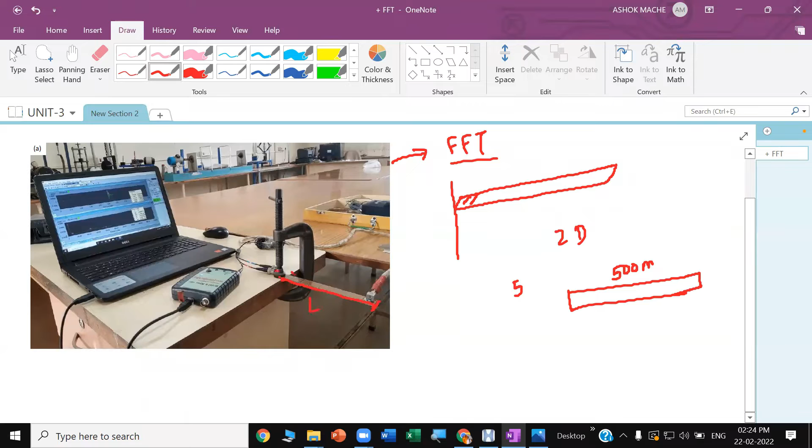This is a cantilever plate, and its length is 500; the length we can vary, because this free length we can measure from here up to the free end, right? And you can vary this length just by clamping on this table as per the requirement. What is going to remain fixed is the width, 50, and the thickness, 4. Okay, so that will remain the same.

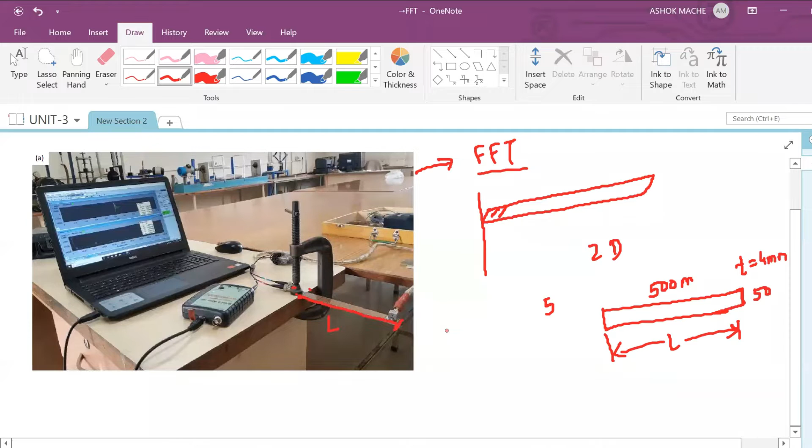Width is 50 but length you can vary here, and you will have different sets of readings accordingly, and you can find out the corresponding natural frequencies and mode shapes. Okay, so also you can find these by using a formula. So this is that formula: omega n is equal to 1.875 squared, under root EI by rho A L raised to 4.

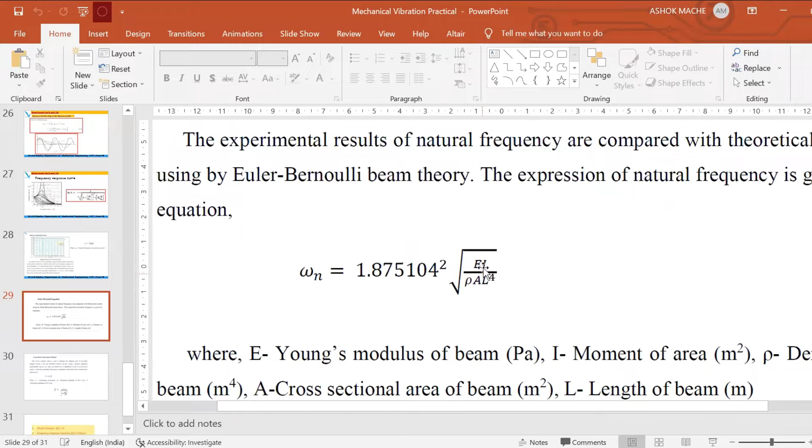So here E is the Young's modulus, I is the area moment of inertia, rho is the density of the material, that is steel, A is the cross-sectional area, L is the length of the beam. So these are the things. Omega n we can find out analytically by this method.

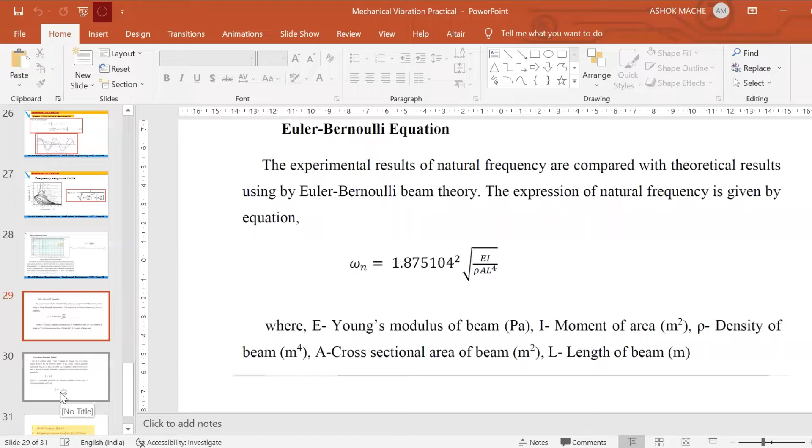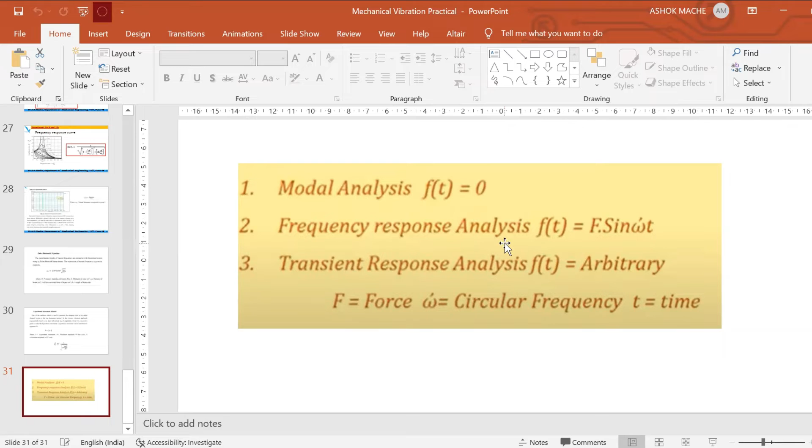And here what we will be doing is the modal analysis, which is in the absence of external force, so f of t will be 0 here. We can apply a force also, but in modal analysis we will not apply it. The steps are like this. I will explain the steps here clearly. First I will create the meshed model.

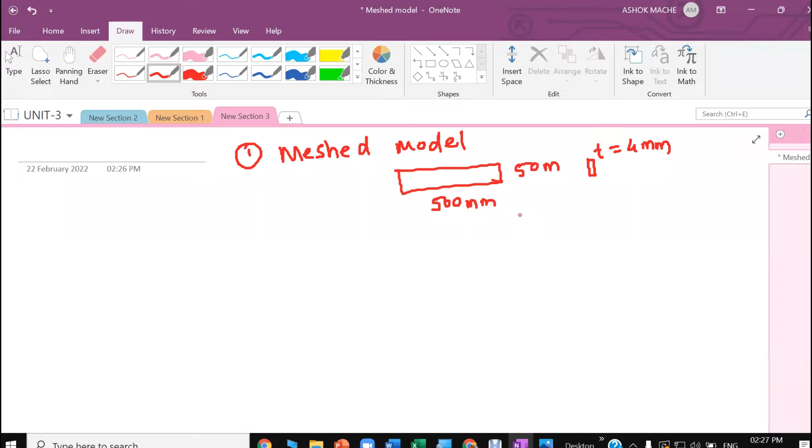For the size of this plate, I will take 500 as the length. The width will be 50 and the thickness of this plate I will take as 4, which is the actual specimen that you are going to use for your vibration testing. So I will keep the same so that it will be easy for you people to calculate. Okay, so we'll go for this.

We'll create the nodes, then the surface, because we are doing 2D meshing here. So I will create the nodes. First will be this. Once you select 0 0, just hit the create button, and one node will appear here. You can always fit the model to the screen.

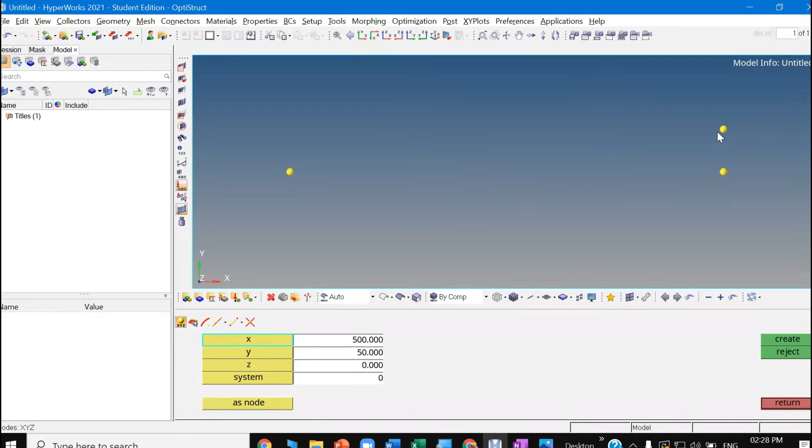Next, the x coordinate will be 500. Then you can hit the middle mouse button instead of saying create; you can do either way. Width is 50, so the y coordinate will be this, and then if I keep x coordinate 0, you get this. So you got these 4 nodes, and we can create lines out of these nodes.

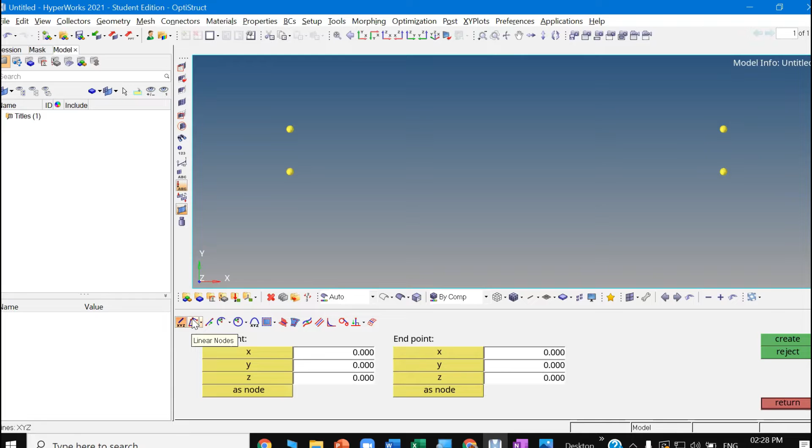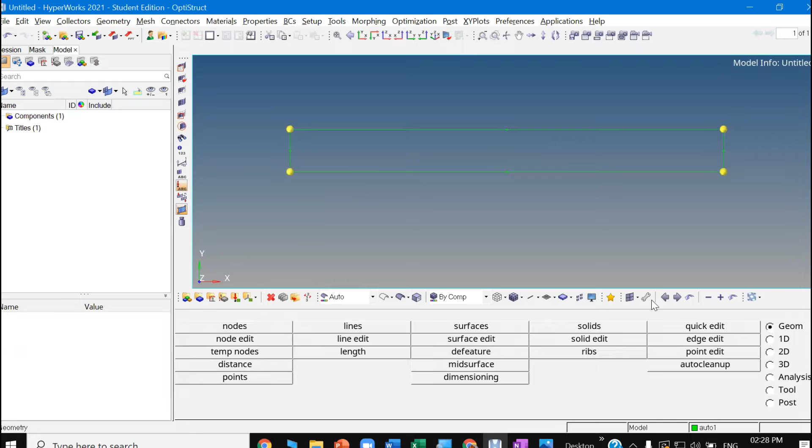So we can go to the geometry page and select lines here. Select linear nodes. I will click this to this, so the line is created. Then from this node to this, hit middle mouse button; this node and this node, middle mouse button; this node and this node, middle mouse button. So lines are created, and automatically you can see the component is created.

If you create lines or elements, a component will be created, and whatever mesh model is there, nodes and elements, will be stored in this component, right? I will rename this as cantilever beam. So once these lines are created, we can create the surface out of them.

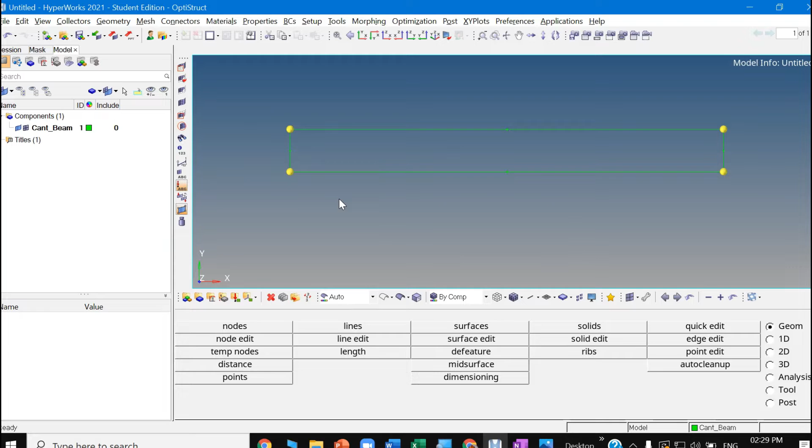For that purpose you can go to 2D and use the ruled option here. In this ruled option you can create the surface from the line list. Select the lines in sequence: 1, 2, 3, select only 3 lines, and for the closing line, whenever you want to select the last line, you click the next line list and then select it. So you must follow this.

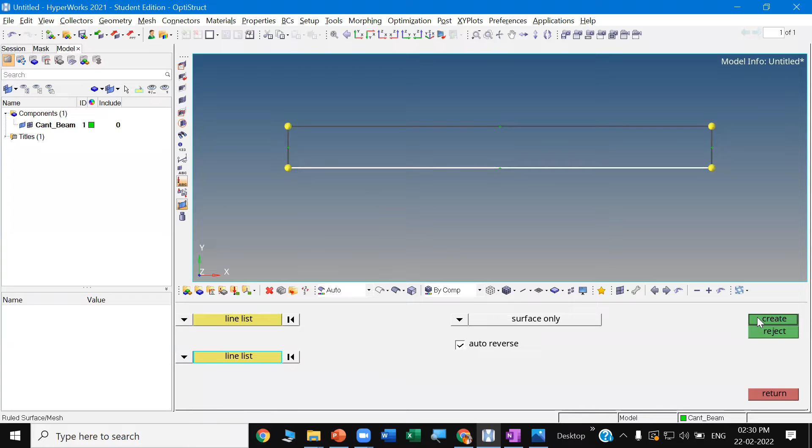There are different options: you can mesh and delete the surface, mesh and keep the surface, or create the surface only. Let's do create surface, so that we get the idea that the surface is created. Once this surface is created, you can mesh it by going to the auto mesh panel here, and you will have this surface.

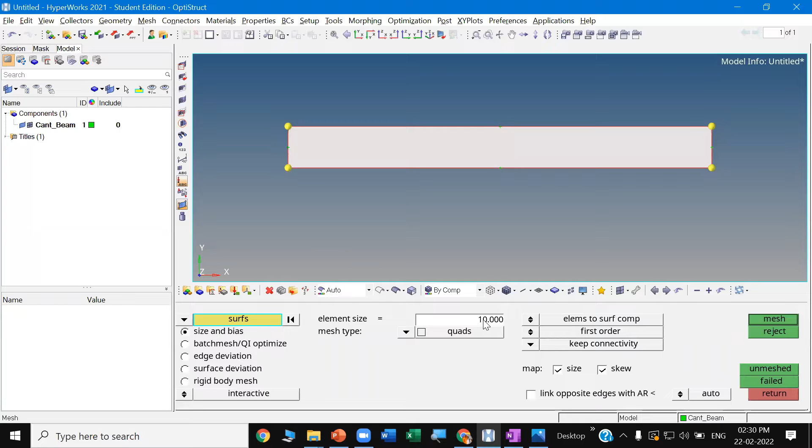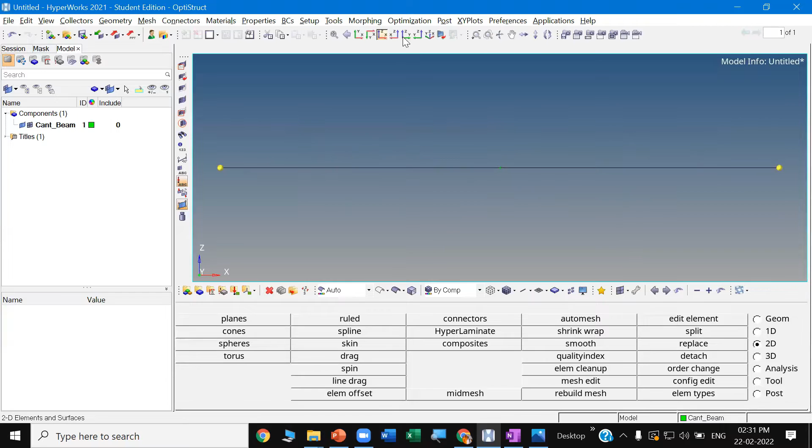Before that, select the elements as quads only, select this surface and just mesh it. Element size is 10; if you want it smaller, you can do that also. I am keeping the default mesh size. Now it has been meshed. So our mesh model is ready, and if we click on this, you will see the edges clearly. We can view it in different views like ISO.

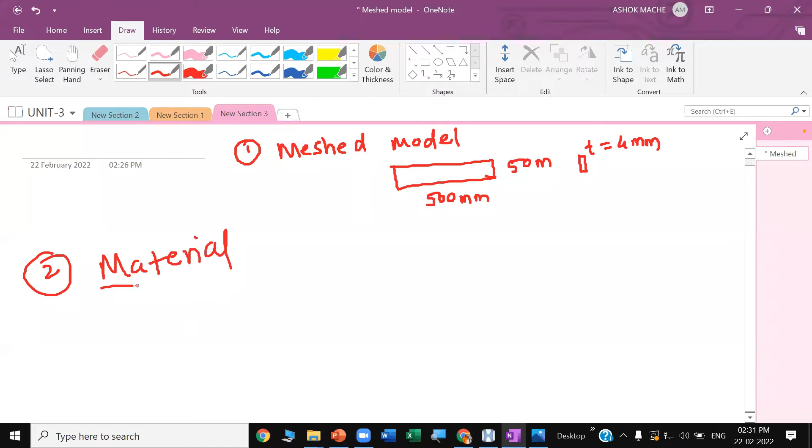Okay, so this is the first step, and now coming to the second step, that is to define a material. We have to define the material model. So this is the second step. So we'll go for defining the material. That option is just near to these components. You can create the materials here, and then you will get here create.

So I will give the material name as steel material for cantilever beam. Okay, steel material for cantilever beam, and this material is isotropic. You can name anything, right? And here the material card you have to select, because for isotropic material either MAT1 or MAT4 material cards are available. MAT1 and MAT4 stand for isotropic material in OptiStruct.

For different softwares it will be different. Just like for LS-DYNA, it will be MAT24. So once you give create/edit, because there you have to give the properties, you can say create/edit, and here you can define these properties. By default the steel material properties will come there. But if you are using a different one, then you can edit manually here.

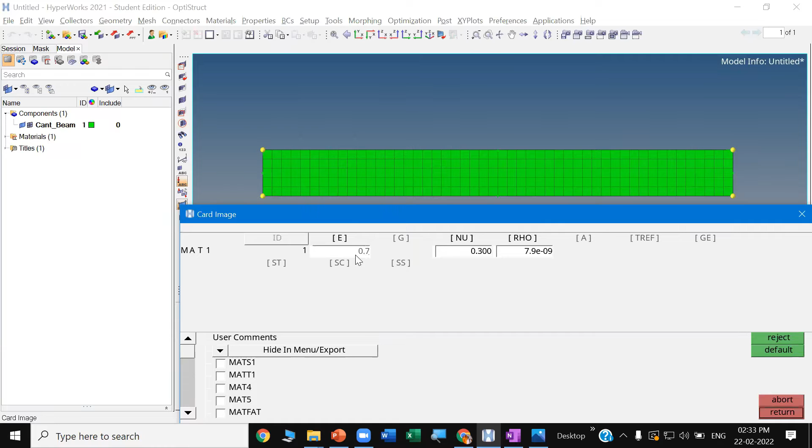Suppose if it is aluminum, then for aluminum the modulus will be 0.7e5 like this. But now here it is steel, so you can write 2.1e5. Likewise Poisson's ratio and rho are given, so I will keep them as default. Once you create this, immediately this material card will appear here. You can even change the properties from here also, suppose if you want to make the Poisson's ratio 0.2.

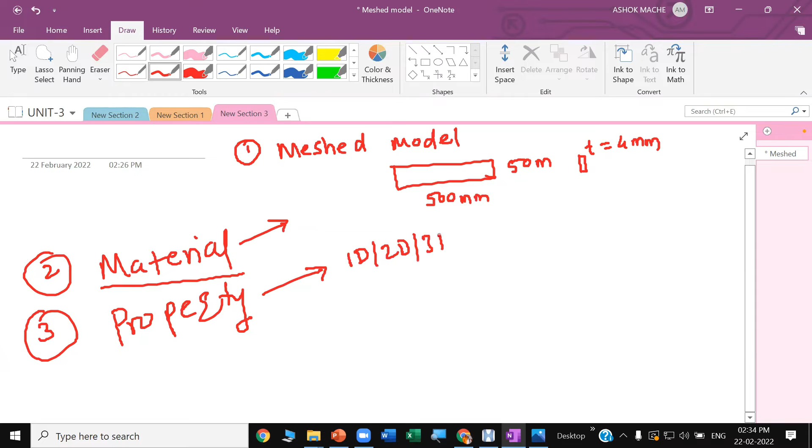So materials we have defined. The second step is over. And what is the third step now? We have to define the property. In the property, basically we are selecting what type of element, whether it is a 1D element, 2D element, or 3D element, that we will be defining here, and what type of stiffness matrix, what type of formulation you are going to use.

In a 1D problem, you again have different types, whether it is a bar element, a beam element, a spring element, or whatever. 1D also has different types of element. So what you select matters, because the degrees of freedom associated with each element are different. A bar element has only 1 degree of freedom per node. For a beam element, there are 2 degrees of freedom per node, one rotation and one translation.

Similarly for 2D, you have different formulations: plane stress, plane strain, then shell element, or axisymmetric, like that. Different stiffness matrices. Even the plate element is also there. Each has different degrees of freedom. If you consider the plane stress condition, it has only 2 degrees of freedom per node, that is translation along the y-axis and translation along the x-axis.

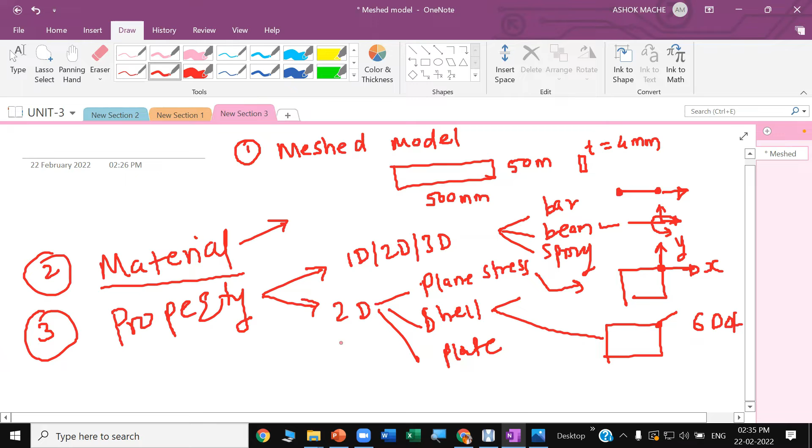If you take the shell element, you have 6 degrees of freedom per node, that is translation in x direction, y direction, and so on. I think I talked about this in the theory also. So these are the things you have to define in the property. Also if it is a 2D element, from the mesh geometry you will get the length and width, but thickness you define here, suppose 4 mm. That's why defining the property is important. I will show you how all these things can be done.

So going to this, after materials there is an option property, and in property you can just name this plate cantilever beam, cant beam, and for that I am selecting the shell element. So you can write like this. Type will be 2D here. Card image is PSHELL. For shell elements you have to select the PSHELL configuration.

So here you have to select PSHELL, and the material is already defined, so you can select the steel for cantilever beam. So these things you will be defining in the property: name, type is 2D, card image is PSHELL, and material is cant beam.

So once you do this, then just say create edit, or you can just say create, no problem, right? If you just say create, that property will appear here. But here we still have not defined thickness, but you can define it here. So you can see here, I can define the thickness, suppose 4 mm. So 4 mm thickness I have defined. You can edit that from here also.

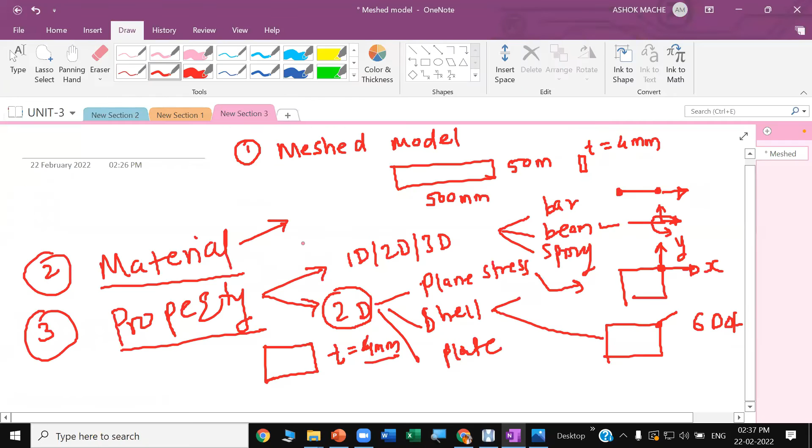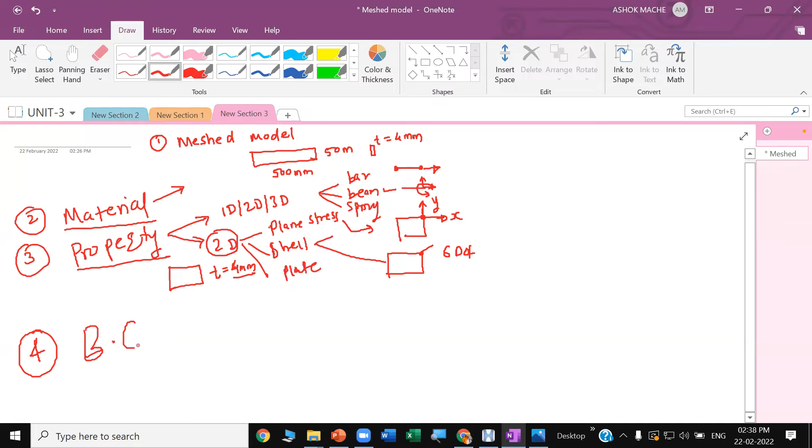Okay, so if you see here, card image is PSHELL, this is the material, and the material will be selected by default, and thickness you have defined. Okay, so this is important. So the third stage is this, and now the next stage, once you define the property, is that you have to define load boundary conditions, right? Load boundary conditions, that is the load collector. So here what will be the load collector?

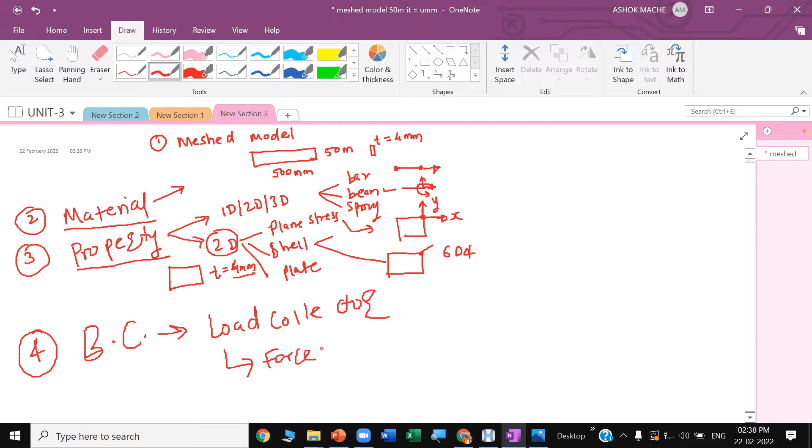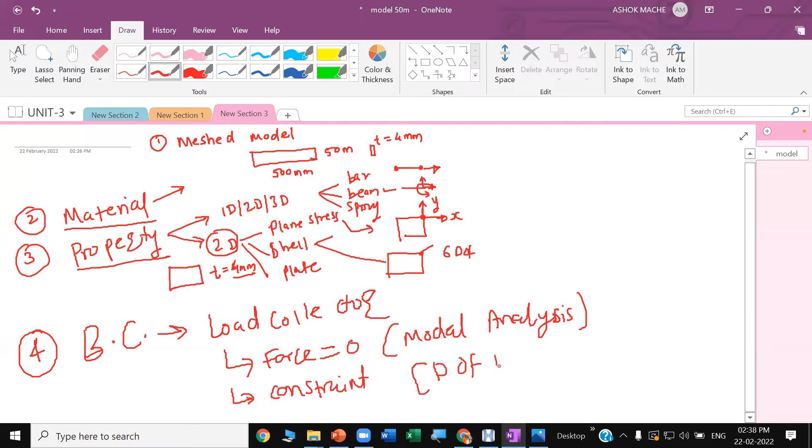The load collector, because now there is no force. Remember that force is zero here because this is a modal analysis. Since modal analysis is done in the absence of external force, force is zero. But you have to constrain the structure, meaning you have to define the constraint, the degrees of freedom you have to decide here. And since this is an eigenvalue problem, you have to define one more card here, EIGRL.

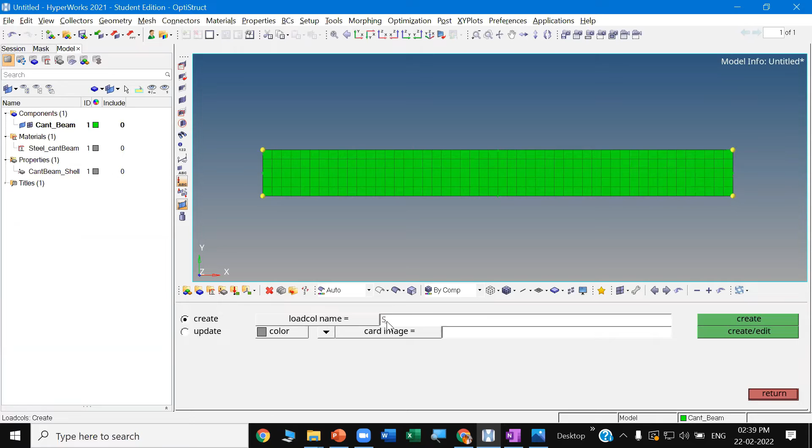Next to this property, you can see all these are in sequence: component, material, then properties. After properties we can go for the load collectors. Force is not required, constraint is required, and we call this a single point constraint, SPC. We can just say create. Immediately it will appear on the current page. You can change this color, suppose to red, like so. This is the SPC.

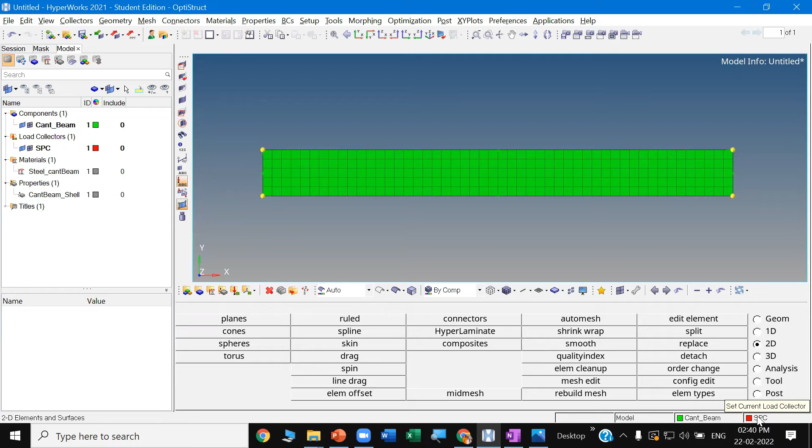Once you define the single point constraint, you have to tell the software which nodes have been given a single point constraint. So you make the single point constraint the current page, go to the analysis page, and select constraints. Here you will have the degrees of freedom, whether you want to release or arrest them. Then you define the nodes you want to fix. For this cantilever beam, the nodes on one side are fixed.

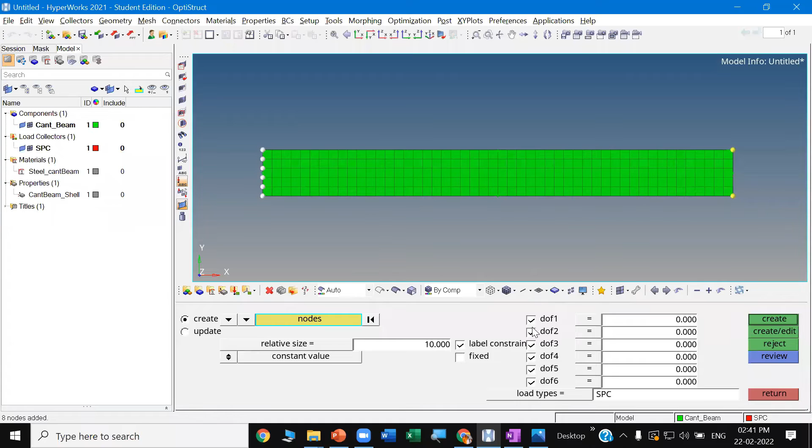So here you just press the shift key and drag your mouse to select these nodes, like this. Once you select them, all degrees of freedom have been checked. You can just say create. Immediately you can see all the degrees of freedom 1, 2, 3, 4, 5, 6 are constrained, that is 3 translations and 3 rotations.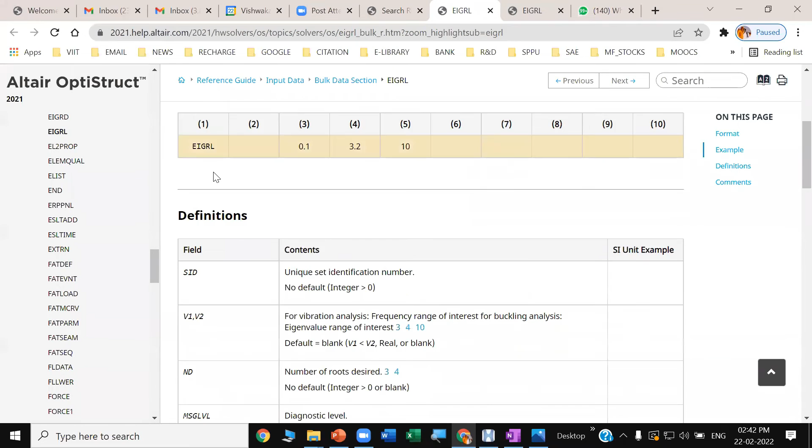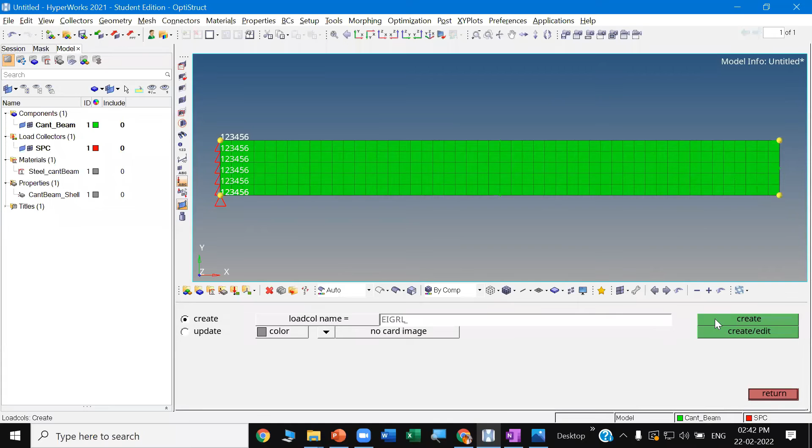This EIGRL bulk data entry defines data required to perform real eigenvalue analysis, vibration or buckling, with the Lanczos method. In this you have to define V1, V2, and the number of roots to be extracted. For an eigenvalue problem, this card you define in the load collector. Again, go to the load collector and say EIGRL, create. This load collector will be created. You can change the color to something else.

And here you have to select the card image as EIGRL. So what is EIGRL? As I explained, it defines the data required to perform real eigenvalue analysis. You can find this page; it is very simple to get the help. You can go to the HyperWorks help home.

So I have defined this card EIGRL, and then the frequency range you can define, from the minimum, fundamental frequency to the maximum frequency. I don't know the range, so I will give some range up to 100,000. Number of modes to extract, let's say 10 modes.

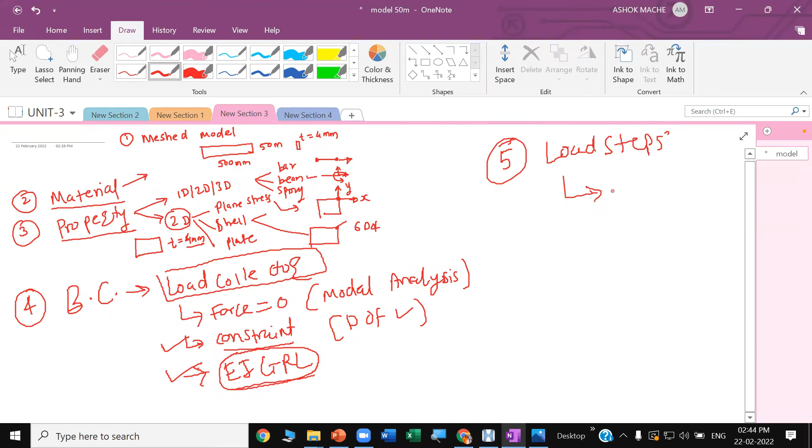Step number 5 is load steps. In load steps you define the type of analysis, whether it is linear static, thermal analysis, or modal analysis. There are different types of problems.

I have just given you two to three examples, but here you can define the type of analysis in the load steps. So you can just go to create here, and say load steps. Okay, and I will say modal analysis. Once you select this, the important thing you have to select is normal modes. Analysis type is normal modes.

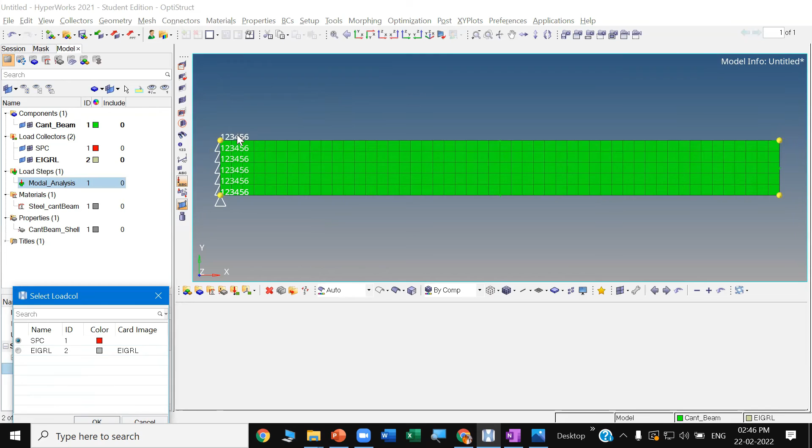Linear buckling is also eigenvalue, but it is different. For modal analysis, you select the analysis type as normal modes. Then single point constraint: these loads are SPC, which we have already defined. Once you select, it will get highlighted here. Just say okay. Then you have to define the EIGRL method structural. Here you define that EIGRL card.

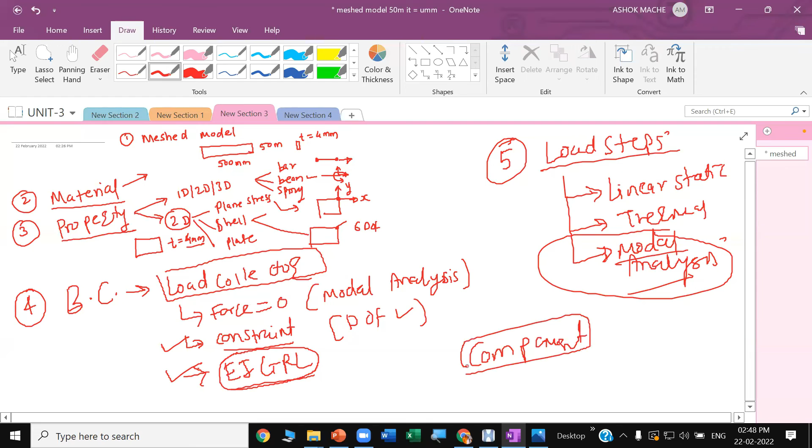And then here you define the output. In the output, you want the displacement. That is the only thing. Strain is not required, but let it be. We created a component at the start, right? But in that component we have not updated this model with the material property and everything.

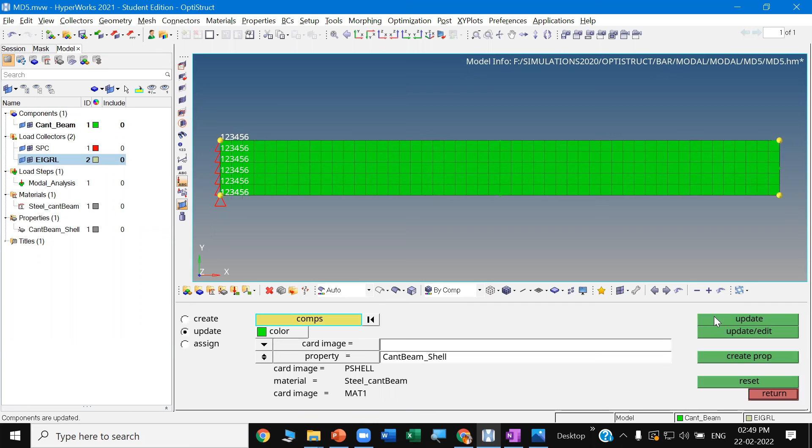For that purpose you again go to the component, say update, then select the component. This cantilever beam is a component. Card image, let it be, but the property: this is the property, and material and other things it will take accordingly. So you tell the code that for this component these are the properties, this is the material, and then you say update. Once it is done, you can save it, and I think nothing is left.

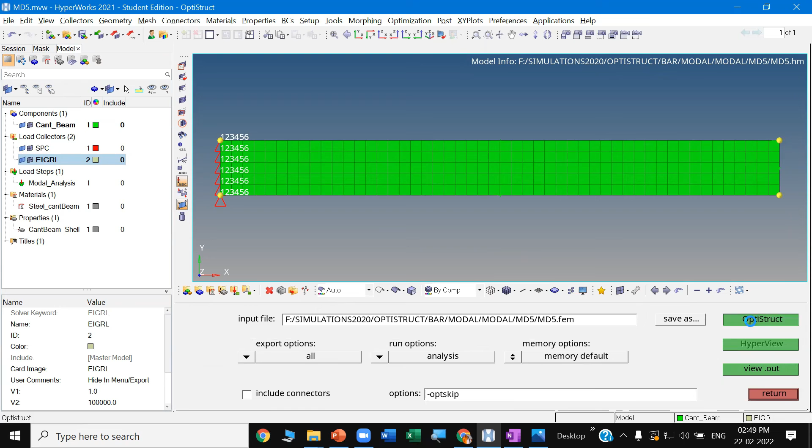Then you can go to OptiStruct here. You can save your model, and export options will be all, run options will be analysis. Just click on OptiStruct, and you will get this result: analysis completed. Once you get this window, click on view, and here output. You will get this notepad file.

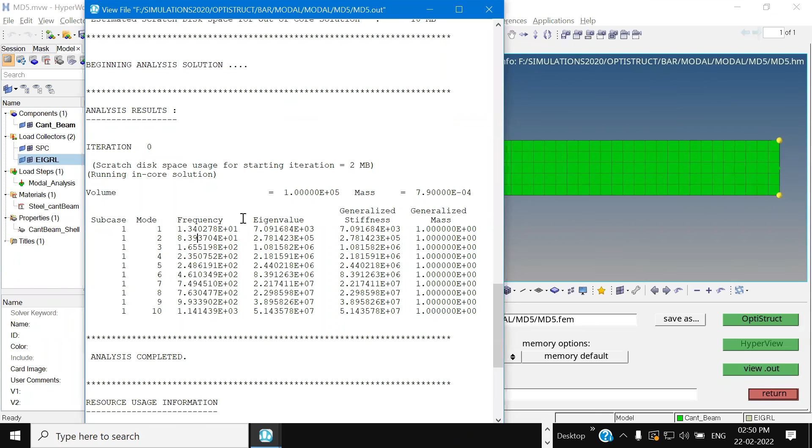These are the frequencies: mode 1, mode 2, mode 3, and so on. We have extracted the first 10 modes, so the lowest frequency is called the fundamental natural frequency. Here 13.4 hertz is the fundamental natural frequency. We have to check whether this is as per the expected value. I have created this in Excel with this formula, and you can also do it here.

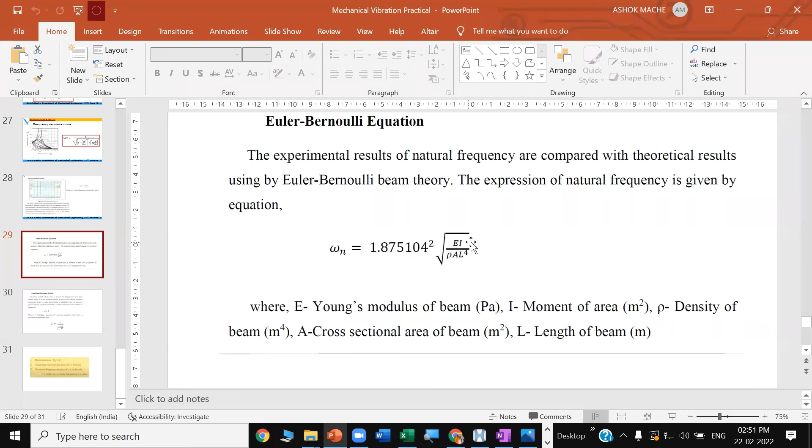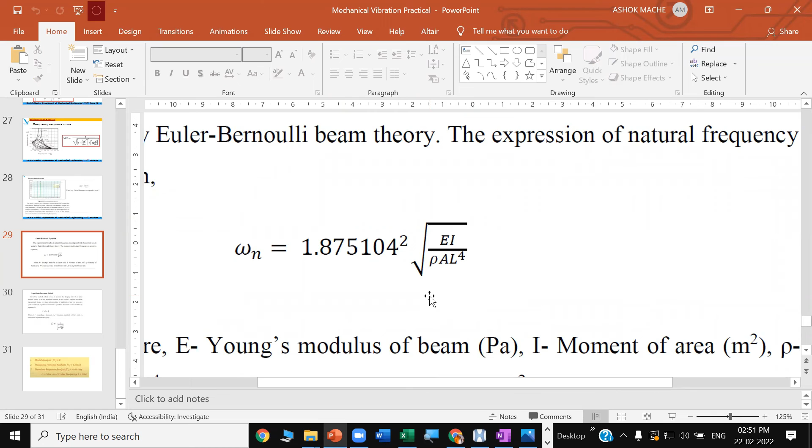You enter E, find out I for our beam, and put rho, the density for steel. Cross-sectional area is 4 mm into 50 mm, and length we have taken as 0.5 meter. Just calculate by this formula. You can also do this exercise. In this Excel I have put the same formula, frequency with 1.8 squared and the square root term.

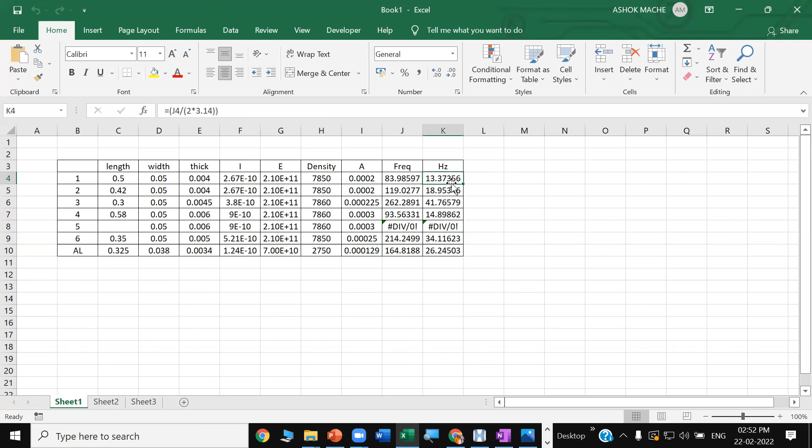Here are the properties: width 0.05, thickness 0.004, length 0.5, this is the I, 210 GPa is the modulus, and 7850 is the density. Knowing these properties, just calculate the frequency, and we get 13.37 hertz, the first natural frequency. Our result is also 13.4 hertz, so it is matching exactly.

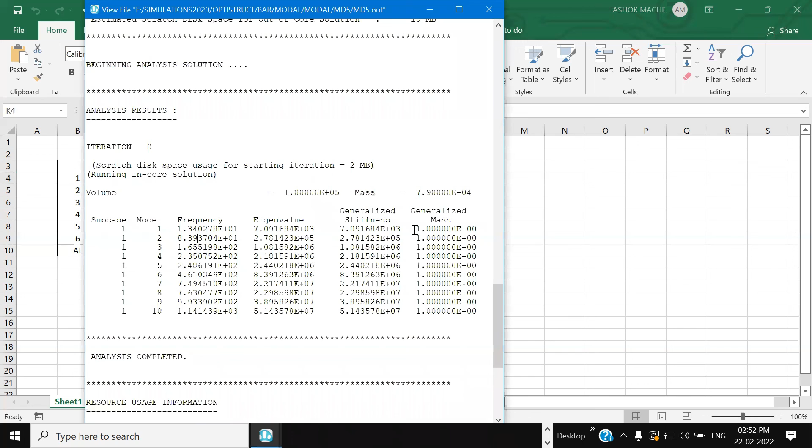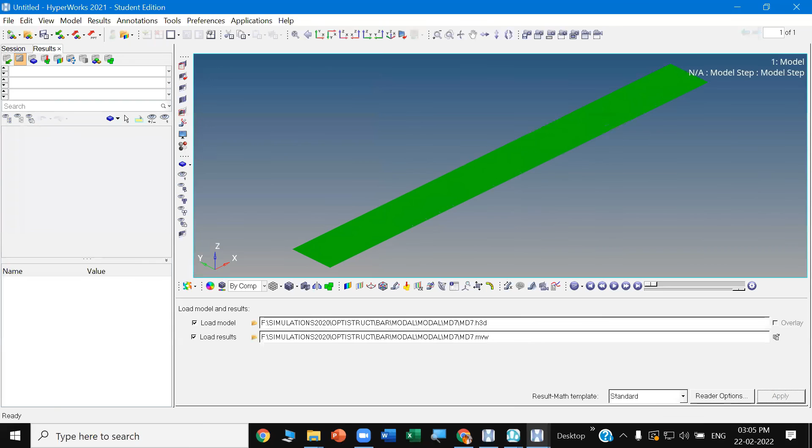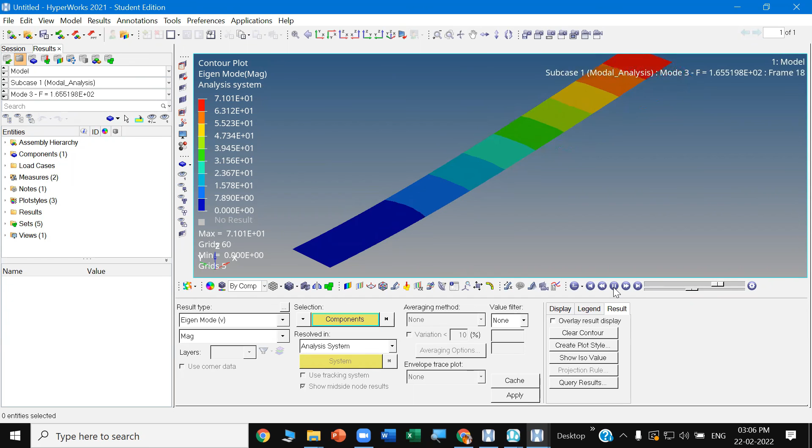Now I'm going again to the HyperView results, and we'll see the animations. I will just click on results. This is the first mode. You can select the next mode; this is the second mode of vibration. Again you can select the third mode, then go for the fourth mode. Likewise, you can change the mode from this option here.

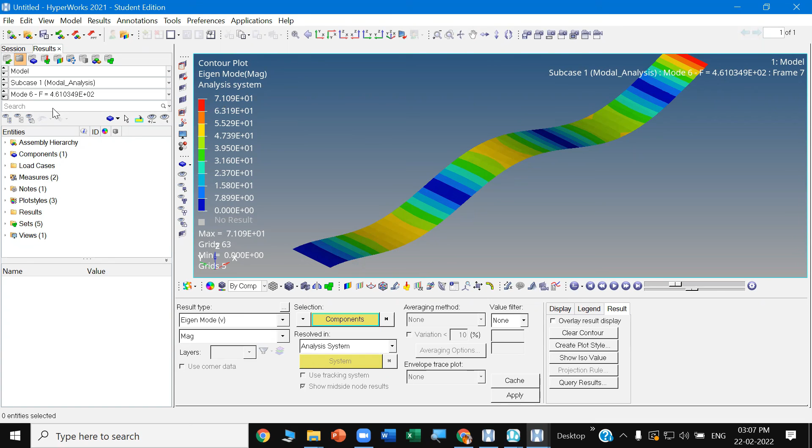Because we have extracted only 10 modes, we get 10 modes of vibration and corresponding natural frequencies. For mode 6, you can see it is 461 hertz, and the corresponding eigen mode you will get here. This is mode 7. The last ones I will just show you: this is mode 8, mode 9, and mode 10. So I think that's it.